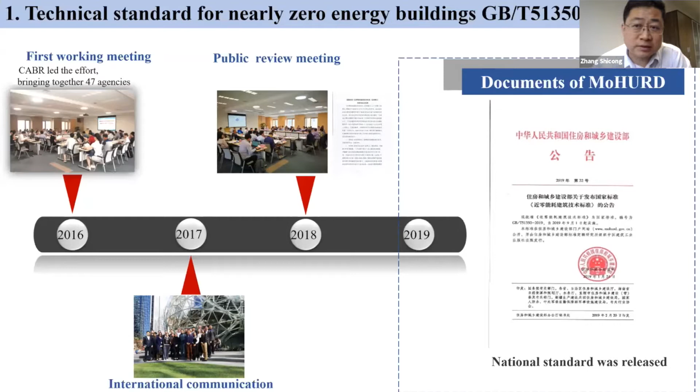And in this standard, because in China the first building energy code was issued in 1986, which is already 30 years ago, and after that the building energy codes in China were upgraded 3 times, once every 10 years. So for this first nearly zero energy building standard, how to lead building energy towards zero should be linked with the previous standards. And it should also be linked with the international consensus definitions and technology roadmaps. That's why we think about this national standard.

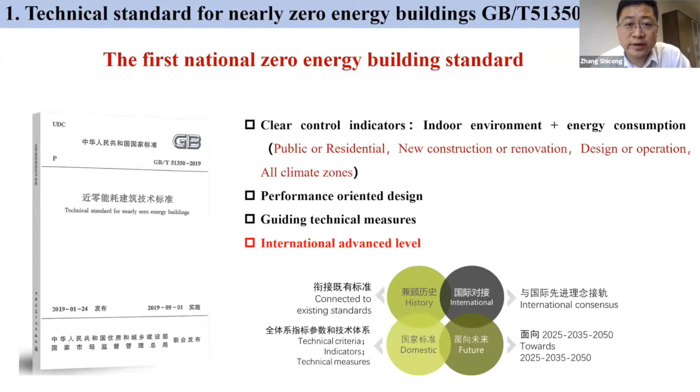So in this standard, we set up a very clearly controlled indicator in the energy consumption index of public buildings and of residential buildings. And besides the energy consumption criteria, we also have requirements for indoor air quality. These are two mandatory requirements.

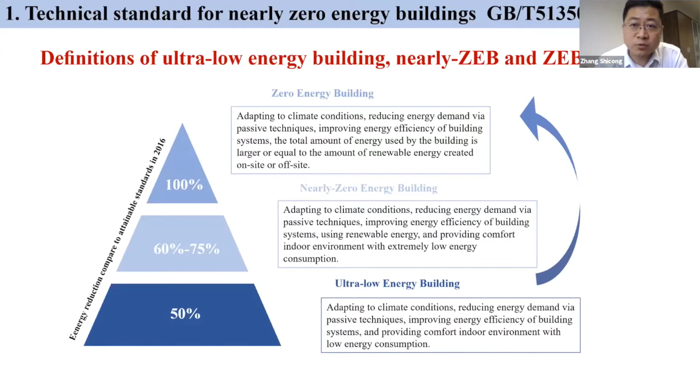And one of the most important things in this national standard is it proposed 3 terms, 3 definitions and 3 technology roadmaps that link with each other from where we are now towards a zero energy building. These 3 terms are ultra low energy building, nearly zero energy building, and zero energy building. The ultra low energy building has a 50% energy reduction compared with the existing level now. Nearly zero has 60 to 75%. And the zero energy building is the same as the zero carbon building which Professor Ed defined. So these are the 3 steps from where we are now till the year 2050.

And so the mandatory building energy codes, we suggested, should follow this voluntary building energy standard to upgrade in the next decades to ultra low, then nearly zero, and then zero energy in the year 2050. This is the first voluntary standard that could lead the industry.

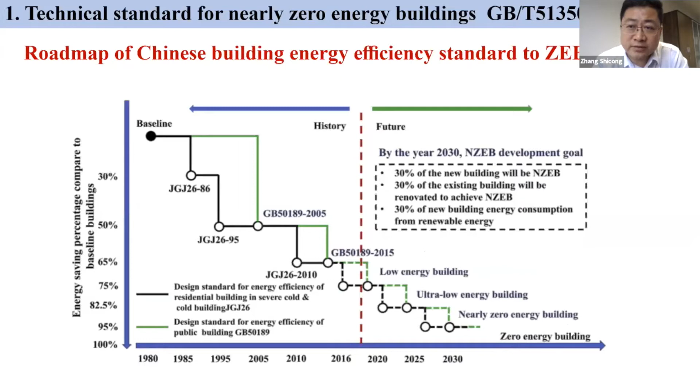And besides these standards, the China central government also set up a 13th five-year research program that was led by our academy, and the research funding was more than 100 million, which is about 20 million USD. And altogether, there are 29 research organizations together to promote this nearly zero energy building idea in the whole of China.

Besides that, the central government also issued some incentive policies and mid to long-term goals for this kind of building. For example, the Ministry of Housing and Urban-Rural Development, in the 13th five-year plan, set a total target of 10 million square meters of ultra low energy buildings and nearly zero energy buildings, and by now we already have more than 12 million square meters in China.

Ultra low energy and nearly zero energy buildings have progressed very quickly because provincial-level and city-level governments also have special incentives and supporting policies to promote this kind of building. For example, a volume ratio reward for real estate developers: if you design and construct this kind of building, you could have a 10% volume ratio reward.

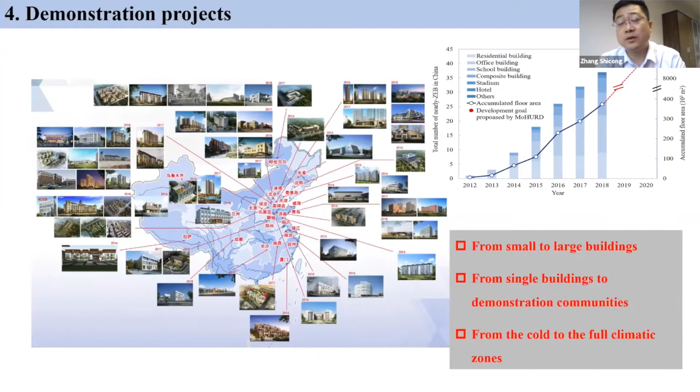And some governments also cover the incremental cost of this kind of building when you use high efficiency building envelopes or building energy systems. So in the last 5 years, nearly zero energy buildings in China grew very fast, from the cold region in the middle of China to the warm region and the severe cold region, from single buildings to community-level demonstrations, and from small pilot projects of 2,000 to 3,000 to 20,000 to 30,000 square meter single buildings, so huge buildings.

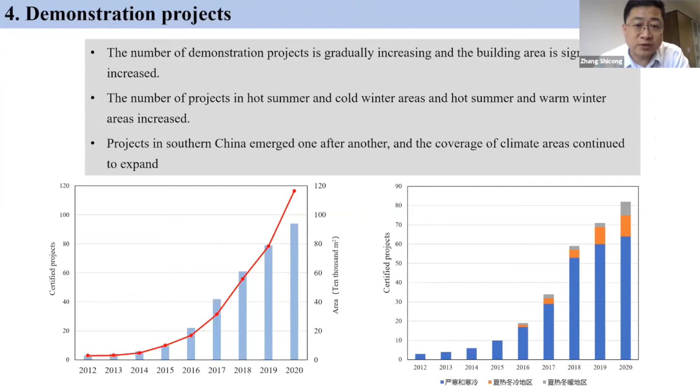So here is the increment in the last 7 years in China. This increased very fast, and we did testing of some of the existing buildings, which showed a 70% reduction in the annual energy consumption of nearly zero energy buildings compared with the average building. This kind of building also has very high efficiency, more than 50%, in the building walls, the building windows, and the building energy system.

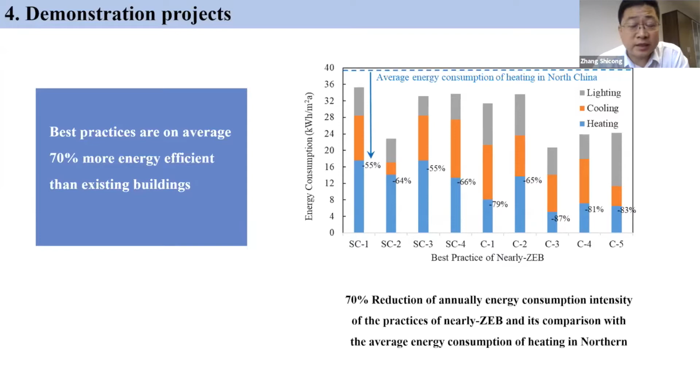In China, this kind of building could influence the total energy consumption in the building sector, and energy efficiency funding in China usually goes to buildings, industries, transportation, appliances, and equipment. So to persuade government officers to promote nearly zero energy buildings, that we could fight climate change and it could be better for our energy system and its future, we calculated scenarios of energy reduction potential to year 2050.

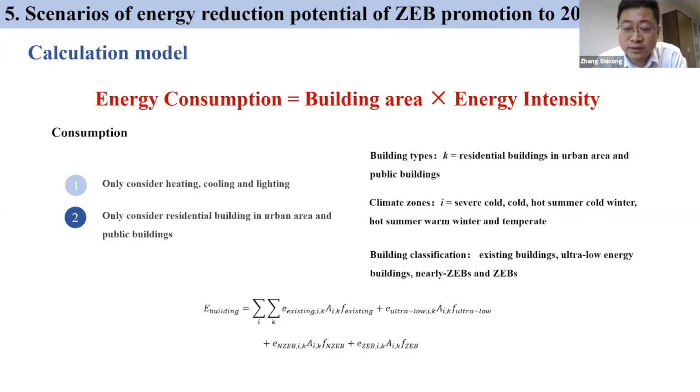This is the energy consumption calculation model, using the building floor area together with the building energy intensity from now to nearly zero energy building, so we can see how much could be saved. We predicted the building floor areas for both residential and commercial buildings in the 5 climate zones, because building energy consumption differs by climate zone: the severe cold region, the cold region, hot summer warm winter, hot summer cold winter, and temperate. These are the 5 climate zones shown here.

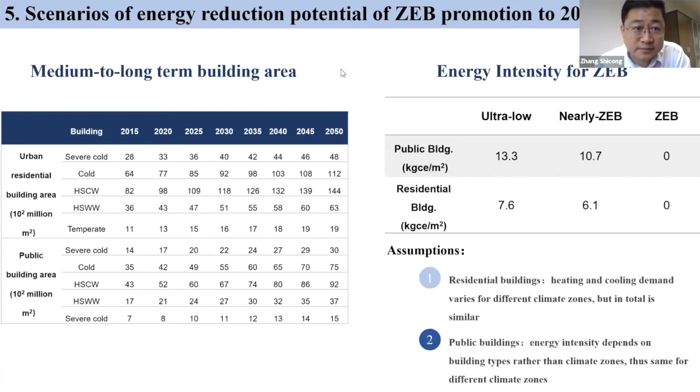The building floor area was predicted every 5 years from 2015 to 2050. The energy intensity of zero energy buildings was predicted following the nearly zero energy building standard I introduced in the first slide. We predicted 5 scenarios, from slow to moderate to leapfrog, where we promote zero energy buildings as much as we could. We can see that for building energy consumption to 2050, if we promote zero energy buildings with much more effort, the peak demand of the whole building industry in China could occur earlier.

One conclusion is that, in general, only if the percentage of ultra low energy and nearly zero energy buildings is larger than 50%, whether new or retrofit buildings, out of the total 60 billion square meters of China's buildings, could the total energy consumption in China decrease.

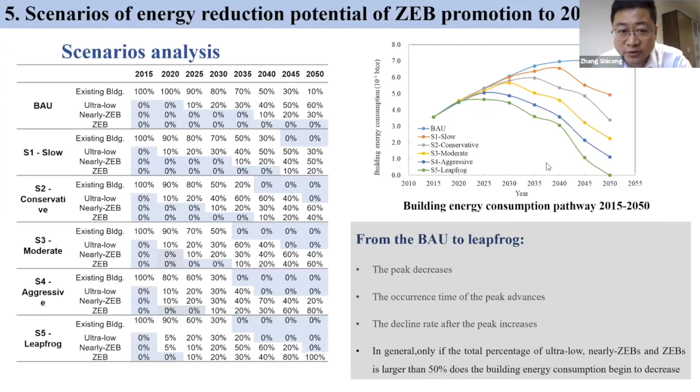Great. Thanks again, Vincent, for this opportunity to present this particular piece of work that we have completed for the city of Kochi, and for providing us this platform to really talk about this work, given the fact that we are talking about achieving net zero.

The speaker before me talked about some of the design standards that China has developed in the last couple of years which will eventually take the buildings towards net zero energy buildings. And in the morning we heard several speakers; particularly I remember the remarks that Ed had made on how government policy and incentives are needed in cities for setting targets for large buildings. But how will these be determined for a city which is in the global south? What enablers are needed? The chief enabler is, of course, data.

And today I'm going to share our experience and basically an understanding of how prepared our Indian cities are in terms of committing to these targets on zero carbon buildings. So just a quick note on what Kochi is like. Kochi is the second largest urban agglomeration in the state of Kerala. It's a tourist center. 27% of the city is covered by water bodies and wetlands. Logically, it is a city which is quite vulnerable to floods. Since it's located in the warm and humid climate, it typically sees very high cooling degree days throughout the year.

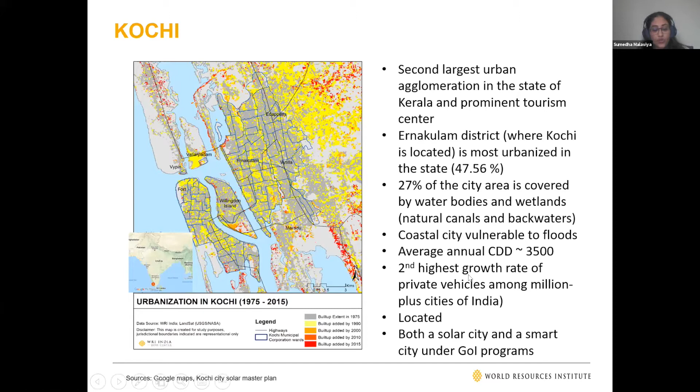And it has been both a solar city and a smart city. So looking at policy convergence, these two aspects became quite important for us for the selection of Kochi as one of the cities that we wanted to work with for the zero carbon building roadmap. As the city has grown, so has the architecture of the buildings. The examples that I provided here are from traditional architecture of houses in Kerala, which look at natural daylighting as well as ventilation strategies.

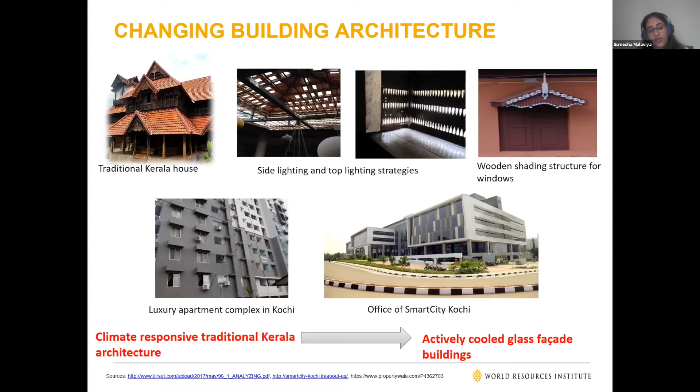But as is the case with many cities globally, with inspiration from Western architecture and design sensibilities, there has been a gradual change in this climate responsive traditional architecture in Kerala towards more glass facade-based buildings. So be it the apartment complexes that are coming up in Kochi or the offices in Kochi, they are looking more and more at aesthetics using glass. But of course, this has implications. And as I mentioned, Kochi is a coastal city, and it saw a very severe event in 2018, with a lot of damage to houses, lives and property in the state of Kerala.

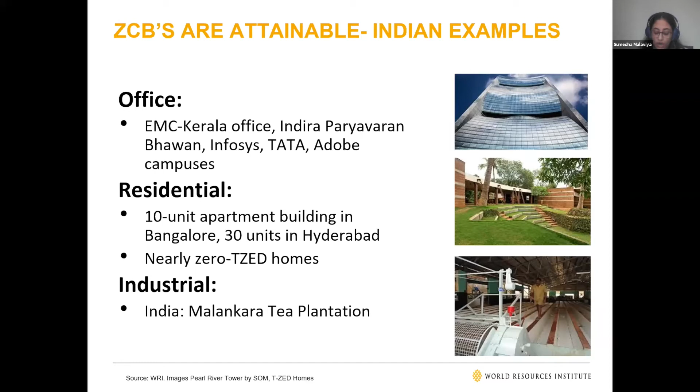Zero carbon buildings have been found to be attainable in India; we have had examples of office spaces, residential buildings and industrial spaces as well which have met net zero energy building standards, but these are quite few. And while these are technically attainable, we wanted to look at how these can be scaled up and what it would look like if the city was to take up something like this. So we went ahead with the following research questions.

Where is the current building stock on the road to zero carbon, which would essentially imply understanding the building stock of the city and the building energy used by different building typologies. Where are the large buildings on the road to zero carbon? By large, I am referring to buildings which have a connected load of greater than 100 kilowatts, specifically because the Energy Conservation Building Code of India covers these buildings. And we have the large residential buildings as well. And finally, what should be the zero carbon building targets for Kochi's priority building typology? So what should be the top 2 to 3 building typologies that the city must prioritize, which should be converted to zero carbon in a phased manner?

Now, all of this sounded really good on paper. As far as the theoretical understanding is concerned, we went ahead with a very detailed methodology of understanding the building sector, collecting data on the building stock and building typologies, understanding the electricity consumption in buildings, given that electricity is the largest final energy use in buildings. Our efforts were mostly focused on the electricity side, establishing the baseline energy performance for both existing and new buildings. A request had come from the mayor of the corporation, as well as a stakeholder committee that we had established, that we look at both existing and new buildings, given that Kochi has a very large stock of old heritage architecture buildings as well.

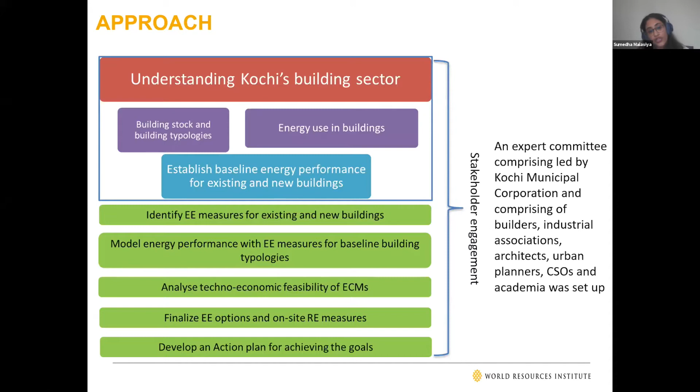And throughout this process, we were supported by a very able team of experts and stakeholders who were interested in really contributing. So pretty much the entire process was extremely bottom up instead of top down, giving us the opportunity to understand what could be the future implementation challenges if something like this was to be imposed top down.

We also established our definition for zero carbon. As I had mentioned, we looked at electricity, so we also had to be realistic and feasible about what could be done at the city scale. So our definition did not consider off-site renewables, because currently we do not have regulatory support for off-site renewables in India, especially for residential buildings. For commercial buildings it's available, but not for residential buildings. We did not account for energy used in cooking, transportation, and the diesel used in backup power generation, looking at achieving zero carbon at the building scale.

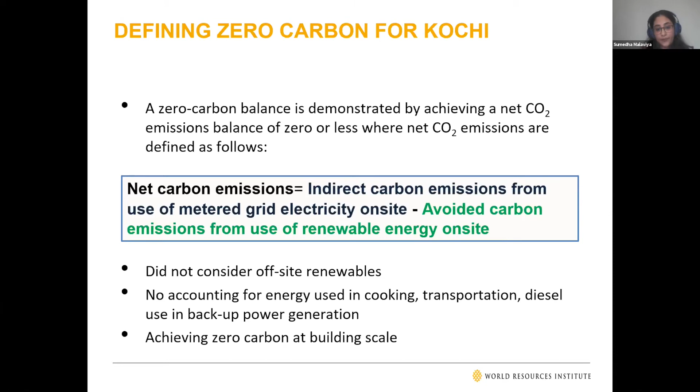A lot of this information on how many buildings and how many floor plans are being approved every year is captured manually and not in digital records. So we finally had to go with whatever we could find, and we were able to establish a trend looking at the typical commercial buildings coming up in Kochi. We found that there were more commercial buildings coming up than residential buildings.

On the energy use side, we found that the residential electricity use sector is significantly larger than the commercial building space, but it is growing at a much slower rate. Looking at the split of electricity consumption across different buildings, we found that 33% of the large buildings, that is the ones above 100 kilowatts, were occupied by offices, followed by retail outlets or shops, and lastly by apartment complexes.

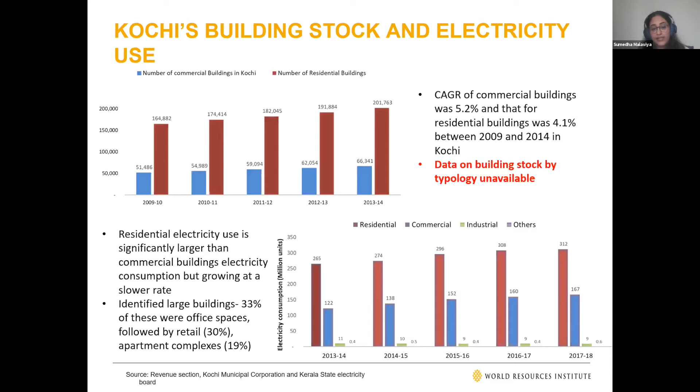So if we look at the pathway to zero carbon for commercial buildings, we modeled the baseline typologies with the measures mentioned in the Energy Conservation Building Code of 2017. This code also allows for integration of renewable energy with the energy efficiency measures. And we found that achieving ECBC and its two other levels of compliance, ECBC Plus and Super ECBC, falls short of achieving zero carbon. You can achieve a reduction of up to 59% when you apply Super ECBC, but the on-site renewable energy mandated for that level is about 6%. It's not sufficient to completely decarbonize at the building scale.

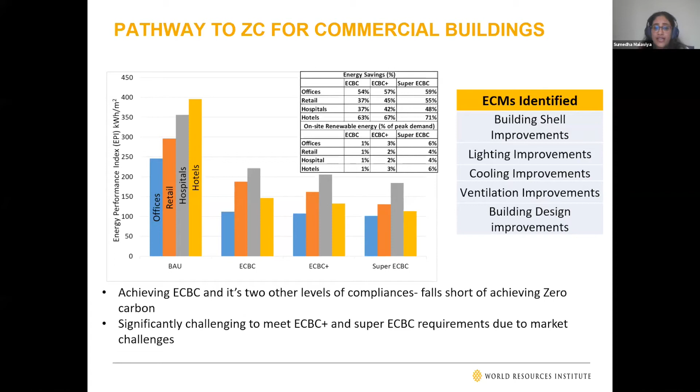And if we look at residential buildings, there the challenge was much larger. This is something that we have also experienced in India, that defining building typologies for the residential sector is quite difficult and a very time intensive activity. So our analysis of residential buildings was limited because of these aspects of establishing reference building typologies for residential.

So we modified our approach, and since we still wanted to understand the energy performance of buildings, we conducted a small survey of about 250 independent dwellings across different bedroom categories, and found that the EPI ranged between 20 to 26 units per meter square. It looked small to us and gave us hope that there is potential to achieve zero carbon with on-site renewable energy for at least these medium high income independent dwellings.

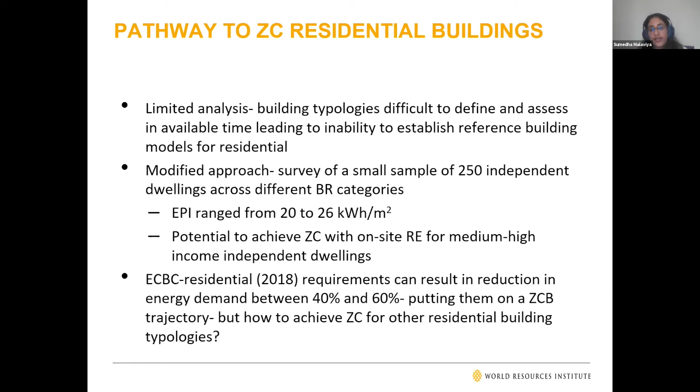And at the time of this work, the ECBC Residential had just been released. So we could look at some of the requirements that could be incorporated into guidelines, resulting in a reduction in energy demand between 40 and 60%, putting them on a nearly zero carbon trajectory. But technically answering this question of zero carbon for other residential building typologies remained a challenge for us.

And if we look at just summarizing the key findings, as I mentioned before, even though the ECBC mandates fall short of zero carbon, compliance with these codes is necessary to put the new commercial buildings on a zero carbon building trajectory. For new residential buildings, we need to do much more than just looking at the building, not just understanding what the building typologies are, but it needs much more understanding of the technical requirements that need to come into picture for residential buildings.

If we have to look at which buildings to prioritize, probably the new public buildings should be prioritized first. And since zero carbon cannot be achieved completely on site, we have to look at neighborhood or ward or portfolio scale approaches. This is also a recommendation that came from our expert committee, which was quite keen that we do not neglect the fact that we are talking about the built environment overall and just focus our efforts on building energy use, but also look at energy use related to buildings. So whether it's transportation, waste management, etc., they should also be a part of the calculation.

Finally, despite these challenges and because of the requests of the mayor and the experts and the stakeholders that we consulted, they agreed on setting this kind of an ambitious vision for Kochi. So having all new government buildings become zero carbon by 2030, all new residential buildings to become zero carbon by about 2035. And given the concern regarding embodied carbon, we also proposed whether all buildings should be put on a path to zero carbon, both operational and embodied carbon, by 2045. And of course, looking at portfolio and ward scale approaches for achieving net zero carbon is something that needs to be explored.

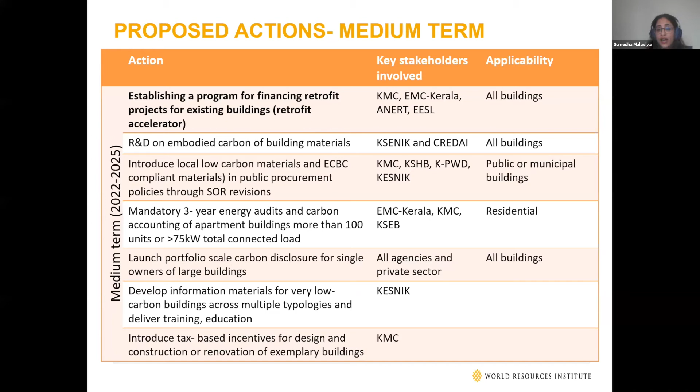Finally, as far as lessons are concerned, I think this was a very good exercise for us to understand where we are as far as taking these commitments and targets is concerned. If data is a key enabler for effective policy making, Indian cities are currently not oriented towards this kind of mechanism, and there is a need for innovations in both the approaches and methodologies under data constrained scenarios. Typically, city governments do not have powers to act on energy efficiency and on-site renewables in buildings in India, but they can try to introduce smaller provisions for specific requirements, but the larger changes can be brought about by the state government.

And while it is important to not lose focus on decarbonizing embodied carbon, because at the city scale, if you're talking about electricity, since they typically have only one power utility, if that itself acquires 100% renewables, the city buildings will automatically become zero carbon, because it's completely decarbonized electricity that is coming.

And finally, framing zero carbon buildings in the context of both mitigation and resilience is important, because I think that's what worked in our case. Even though zero carbon buildings are typically viewed as something from the mitigation side, we noticed that they were also being strongly supported by our resilience experts, that this is what we need as far as energy security and energy resilience is concerned.